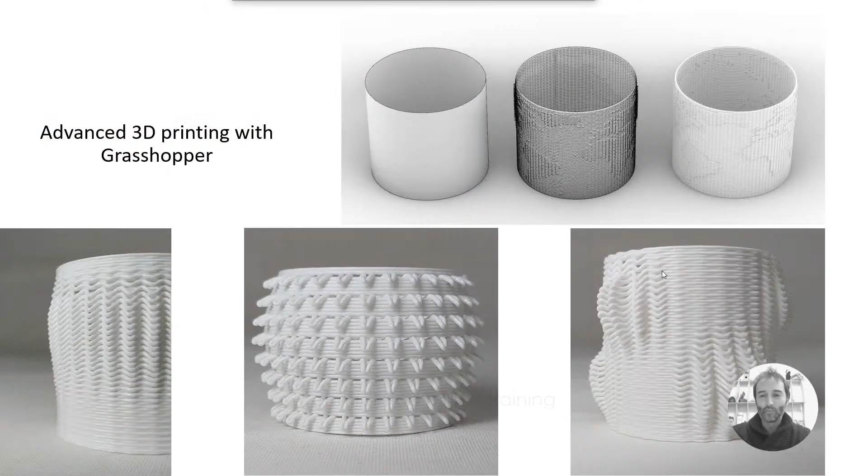There are some examples from the book that we will explain during the course. I know that some viewers of the webinar maybe have bought the book already. Some of them have read it and they give me feedback on Instagram. That's amazing. I love it because we can share problems or things that are not working for them. So feel free to contact me at any time.

But there are many examples that maybe are not that deeply explained, or that the reader of the book had no time to go into. So with this course, I will try to find the base of everything and go through those examples like these ones in the pictures, in order to understand how to control the G-code to create this kind of geometries. In the end, we could do anything. These are just some examples.

For example, I love working with clay, and in that case controlling the G-code is extremely important, because when you're printing clay, the seam is always a problem, basically because the seam will be displayed on the edge of the model. And when you're doing clay, you don't want to have a seam. Also, you cannot modify that easily. So for clay, it's very important controlling the seams. We have collaborated with many designers.

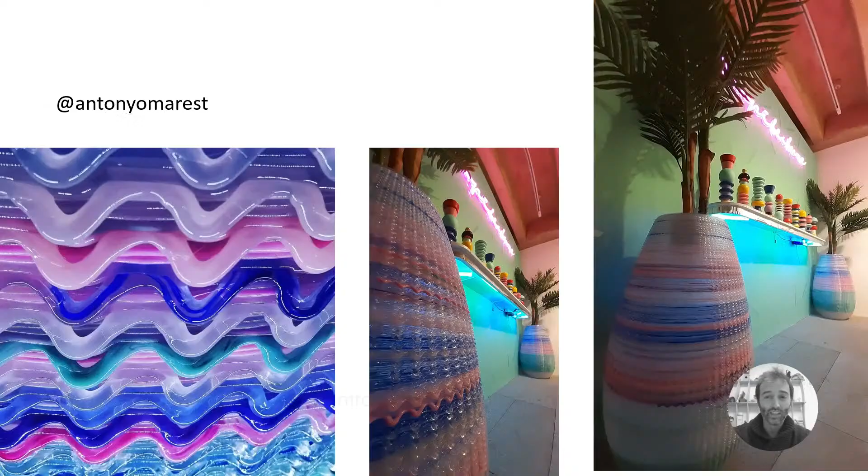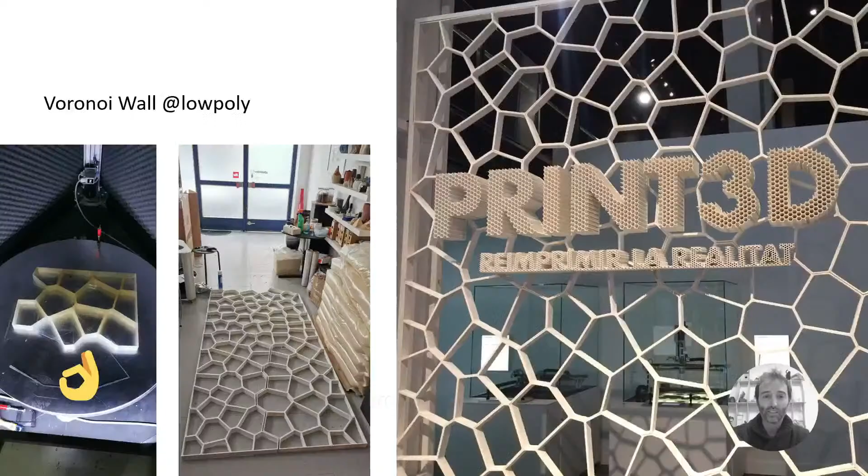These are some pieces he did, some large-scale vases, almost 1 meter high, where we were changing the colors because the printer had a pellet extruder. Controlling these patterns, these waves, is not that easy without entering into the G-code, because most of the time we're not working with an STL file. This is something I will explain later with Grasshopper, okay? But we're basically doing the path for the printer.

And that is extremely important for large-scale models. This was printed with the WASP 3MT, the big printer of WASP, of 1 meter diameter by 1 meter height. This is part of an exhibition here in Spain for 3D printing, Reimprimir la Realitat. We were in charge, with low poly, of doing these walls in this type of Voronoi design. So it was really important to control the path with single lines, double lines where needed, to minimize the travels in order to save time and material. And that becomes especially important when we're talking about robotics with 3D printing.

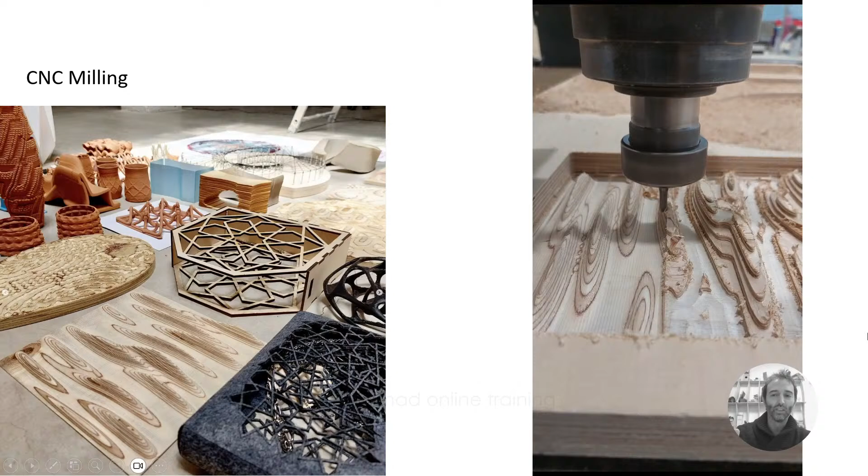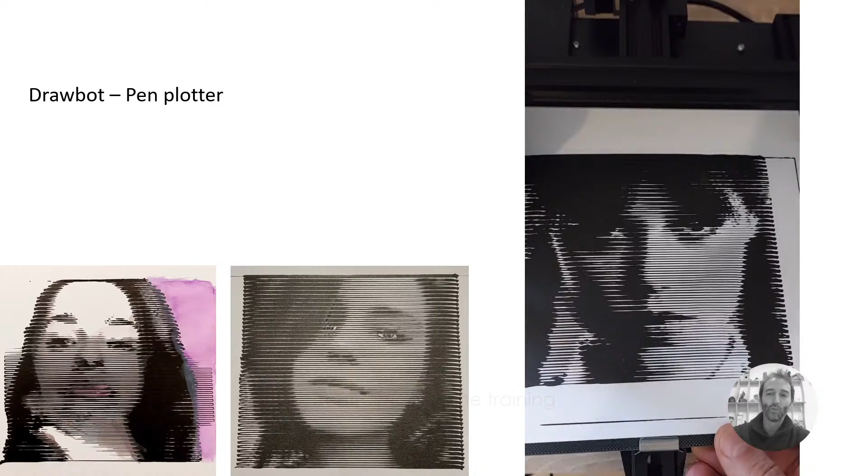Once you know how to control the G-code, you can use it for printing, for a robot, for a 3D printer, for a milling machine, as you can see here that it is doing a parallel finishing. You can use it for any kind of purpose related with CNC, computer numerical control. So this is an example that I love to do.

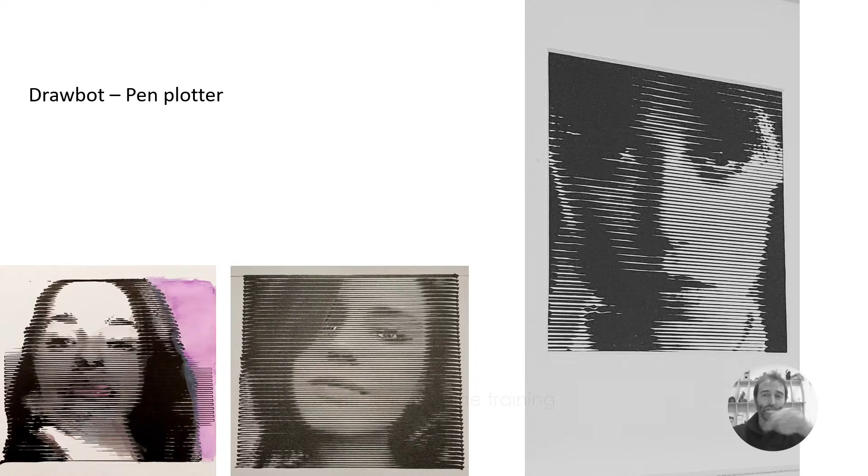I love to work with robots, pen plotters that basically are 3D printers, like in the video. That is an Ender 3 V2 version where you just adjust the extruder to add a pencil or a brush or anything, and in the end what you do is control the motion of the printer, and the output in this case is like a painting. So I find G-code control extremely important for this type of work and many others.

During the course, we're going to work at a small scale, and all the examples that I developed for the course are done with an Ender 3. The Ender 3 from Creality is one of the most popular printers, very cheap. You can buy them secondhand for $100. It's extremely simple. That's why I use this machine, to show that you don't need a robot arm or something like that.

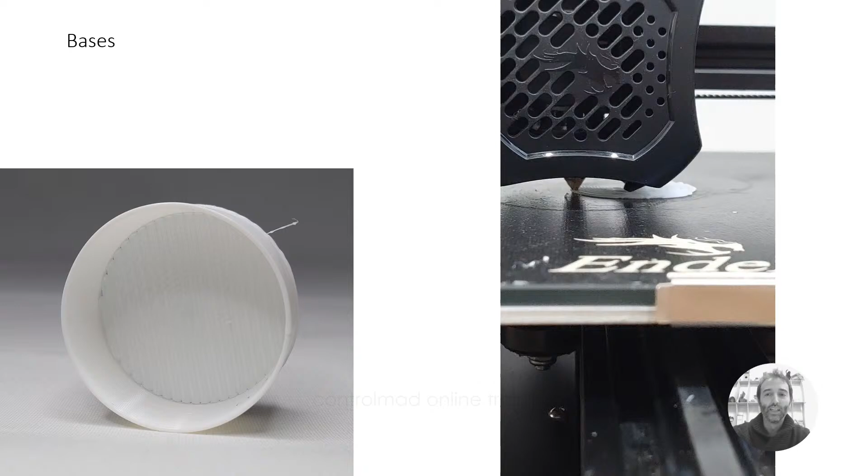Calculating the E value is not that easy, especially if you want to change the nozzle size or the layer height and so on. So we will learn how to put all those parameters into relationship in order to achieve a good result. Then we will go to the bottom and find the best strategy to do the base for the designs.

In this case, this video is not running, but there we go. It's basically doing the base design that can be done as contours or can also be spiralized, or many other things. Once we know how to do the walls and we know how to do the bases, it's just putting together those strategies, and after the base come the walls.

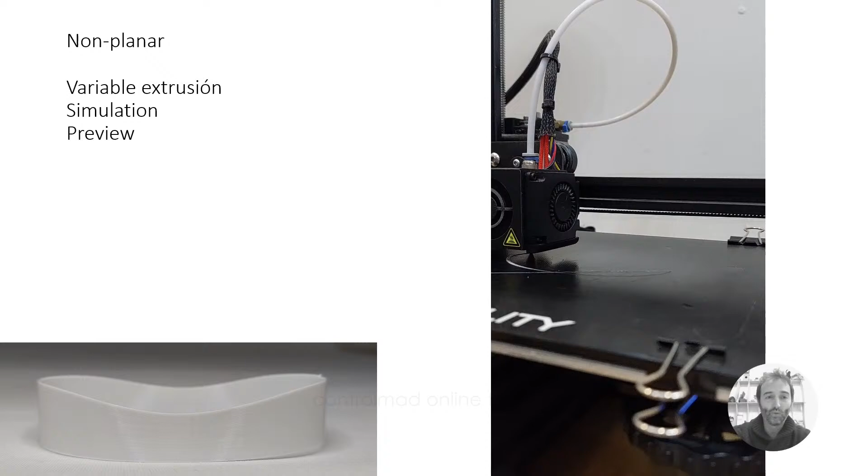As we have total freedom to print almost anything, we can start exploring non-planar designs, and at the same time we'll have to control the variable extrusion of the extruder. It means that, for example here, where the layers are compressed and expanded on the sides, we'll have to extrude less material in the middle and more material in the outer parts, the right and left parts, to have the same thickness for the material.

At the same time, we will try to simulate what's going to happen in 3D, so it's not just curves. We will see them physically, and we will control the preview of the model with different colors and so on. So this is a typical example of variable extrusion. Obviously, we won't have a robot arm for the course. That is something that we are preparing for the future, a course on robotic 3D printing.

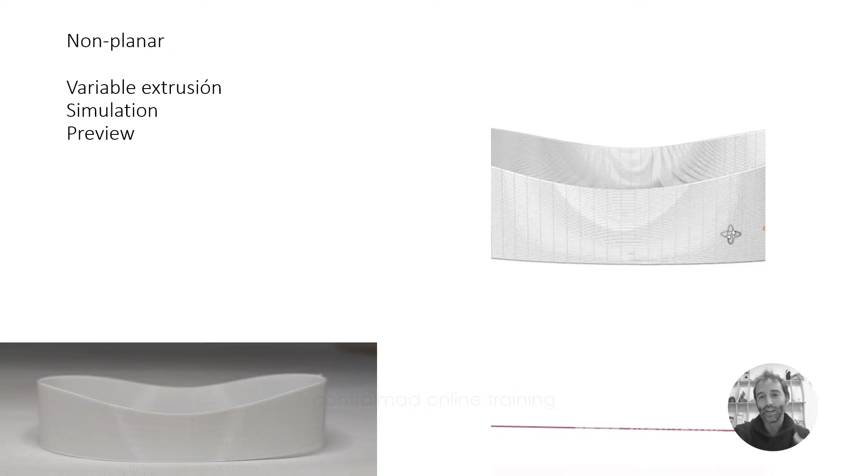The robot rotates the extruder according to the normals of the curve or the surface. With the printer, we cannot do that, so we are limited in the heights of the model that we're doing and so on. But still, we can do many things just with a normal 3D printer.

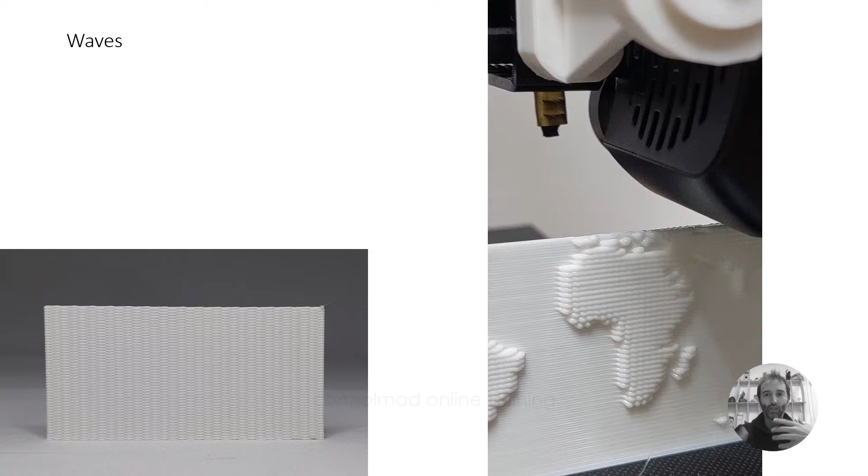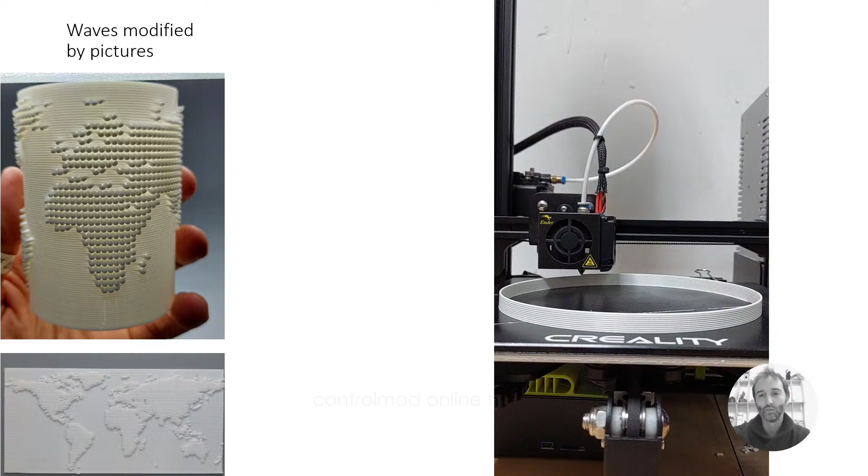As it is very popular, we will also work with waves. As in the picture on the left, we will learn to do wavy patterns, basic ones and more complex ones, and then apply those waves to different surfaces, connected to black and white pictures. This is a very powerful strategy because the black and white of a simple picture, which you can extract from the internet or make yourself in Photoshop, will give you different patterns once you have the weaving system. The waves are just the algorithm, and the picture modifies that algorithm according to the blacks and whites. These are some examples.

It can be applied to just a planar surface, or once we understand it, we could apply it to a rounded surface and more complex stuff. This is an example I did to illustrate the possibilities of printing G-code with this type of printer. I was trying to use the maximum volume of the printer. As you can see, this is part of a lamp project, but we'll do it during the course at a smaller scale due to time reasons.

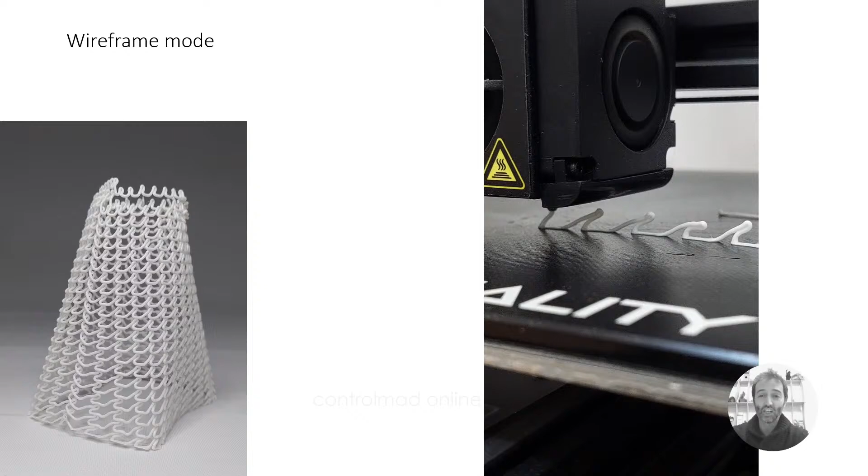And the same as our friends from Nagami, we will explore the possibilities of wireframe 3D printing. Basically it's everything the same. What changes from the previous one is that there we were using an algorithm to create waves, and in this other we're using an algorithm to create a kind of triangular pattern in the air. So we have to do a 3D model, transform it into a wavy pattern that goes up and down with those kinds of triangles, and then the printer will follow those coordinates.

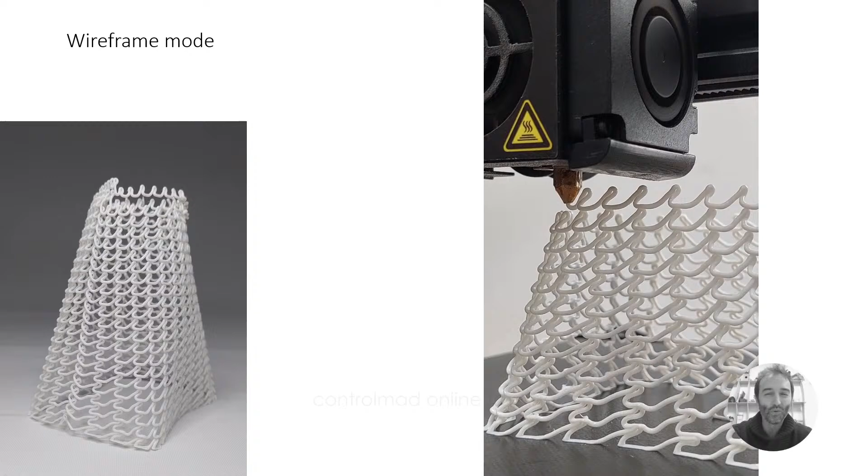So the printers that you have at home can do anything. It's the same as mine. Every 3D printer in the world can do this. The problem is that sometimes we are limited by the slicers, by the software. The slicers are amazing for standard 3D printing, they have all the parameters you need. But when you want to get out of the box, you're very limited by that software. In Grasshopper, any kind of line that you're able to design can be 3D printed, basically.

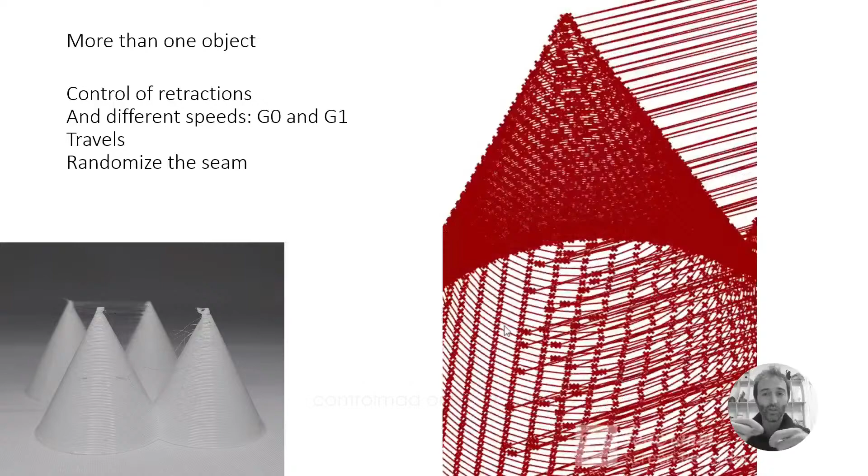Then we will move into something more complex that looks simpler in the end, because it's just a couple of cones, the typical example. But this means we have to 3D print two objects, so we have to calculate and understand the travels. The travel is the motion of the printer without extrusion, moving from one cone to the other. We'll have to control two speeds, one for printing and one for the travel, which is different. So the algorithm in Grasshopper becomes more complex every time, and we will also have to learn to randomize the seam.

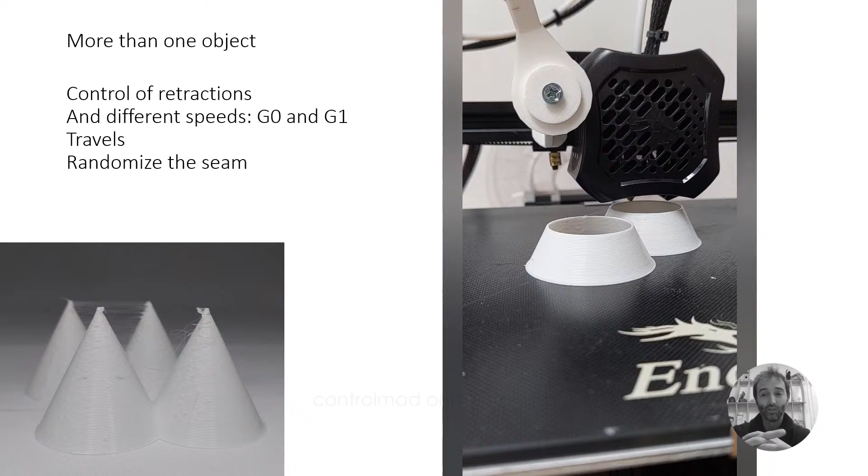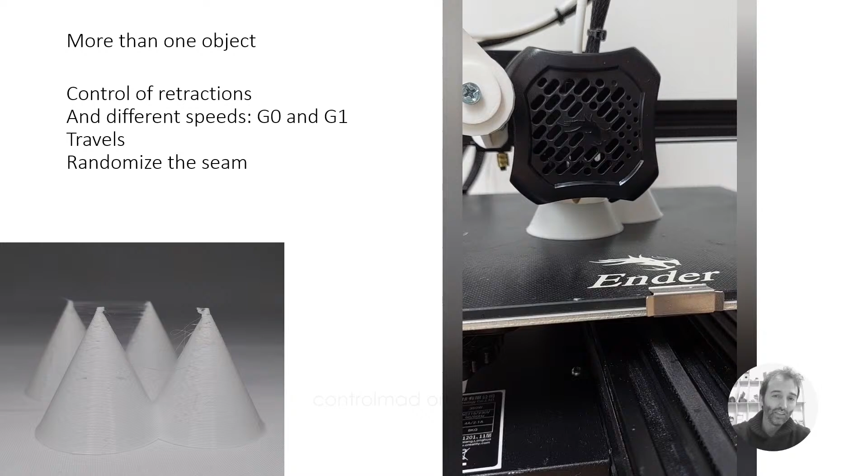We'll see some examples during the course where if we don't randomize the seam, the finishing will not be good enough. There are many details here we have to control, such as the retraction of the plastic back into the tip of the nozzle. That is not as easy as it might look.

So in the end, we will be working like a normal slicer. I made a test comparing my system in Grasshopper with a system like Cura, and the results were the same, even better in Grasshopper, because you have more freedom and can control them better.

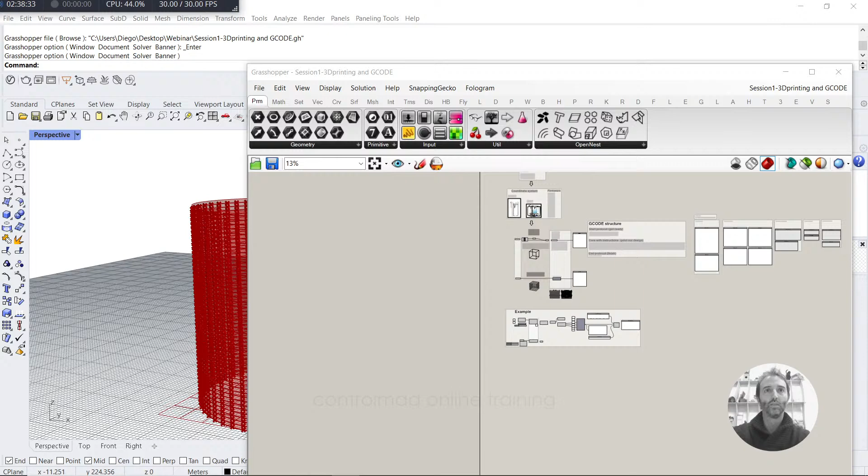We will start with the beginning of the course, because it makes no sense to try to do something super advanced if we don't know how to do the basics.

So I have a presentation here. I love to use Grasshopper for everything. If you research a little bit on me, you will find a video about how to win the lottery with Grasshopper, because I also tried to win the lottery with Grasshopper, since Grasshopper is just a data management software that can work with geometry, but also with data.

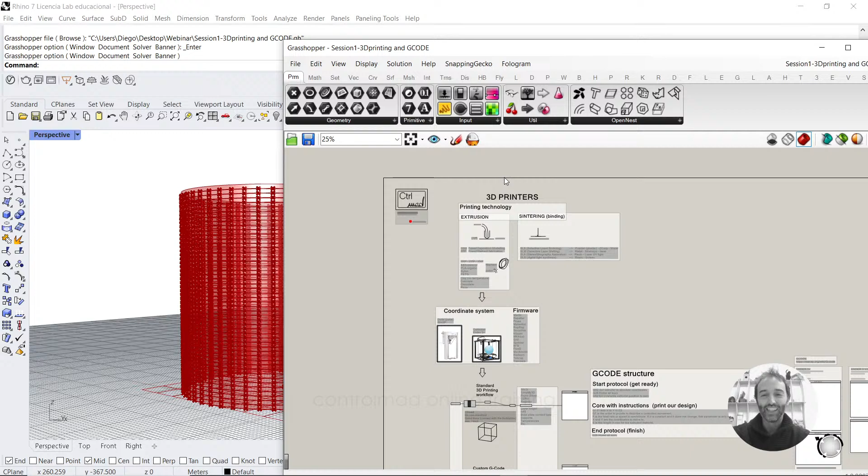Just as we work with data for G-code, which is basically coordinates, we can work with data from a web page, from a database, from the lottery, or anything else. I like to do presentations in Grasshopper with my drawings and explanations and so on.

First of all, we need to understand—probably you are experts on 3D printing, or maybe experts in Rhino and Grasshopper and 3D modeling, or maybe you have no idea about this world. So I'm going to do a very fast introduction about 3D printing to see where we're going to put our focus.

Basically in 3D printing there are two types of technologies: extrusion, FDM, and sintering or binding. In extrusion, we add material on the build plate, which could be preheated or not, and the material could be plastic or many other things.

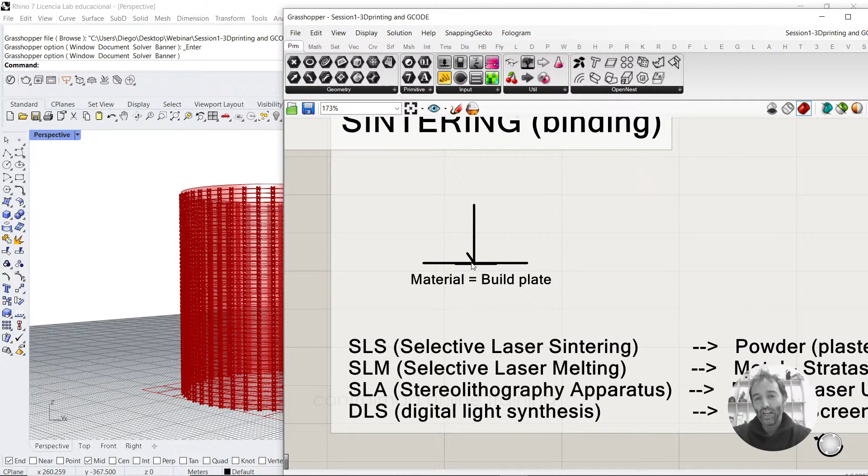In the sintering systems, like SLS, SLM, SLA, or DLS, which are the most common ones, the material is the same as the build plate, and there is another agent that hardens or sinters part of this material. For example, it could be powder like plaster, and the sintering agent is water, or it could be metal for metal 3D printers where the sintering is a laser, or resin printers that use laser, UV light, or a screen like an LED screen.

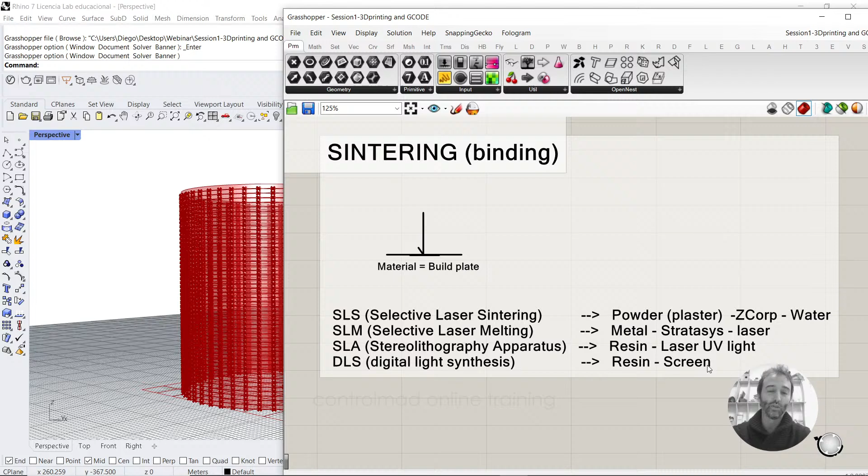But we're going to focus on the extrusion ones, because they are simpler, and so the G-code here is easier to control.

FDM is the general name for this type of machine, fused deposition modeling. If it's specific to plastic, it's called FFF, fused filament fabrication. The most common materials are ABS, PLA, nylon, PETG, and the material could come as filament or pellet—pellets being small balls that melt directly into the extruder.

But it's not only plastic we could use for these machines. That's why I was showing you those examples—we could 3D print clay, and in that case we don't need any kind of temperature to preheat the material. It could also be concrete, chocolate, or pizza.

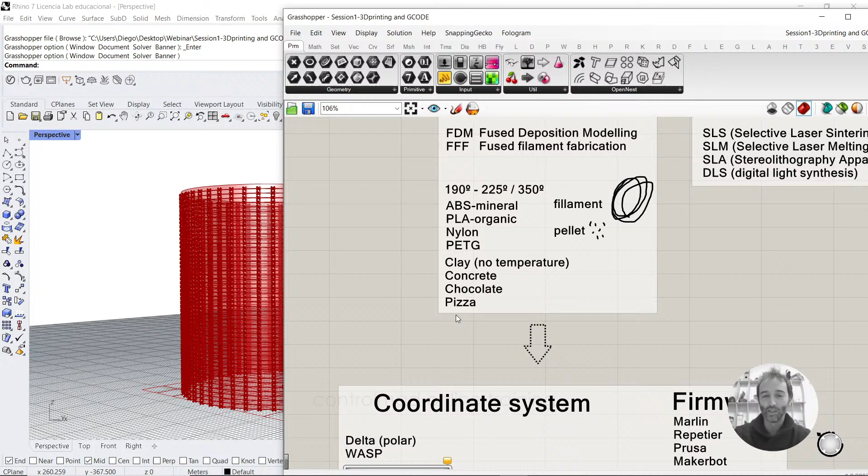Sorry to the Italian people watching, but there is a pizza 3D printer on YouTube, and you can see it has three extruders: one for the base, one for the mozzarella, and another for the tomato sauce. So yeah, we can extrude basically almost everything.

Then we have the printer, which could be two systems: delta and Cartesian. If it's delta, it works with angles, and if it's Cartesian, it works with linear motion in three axes, x, y, and z. But it doesn't really matter which one you have.

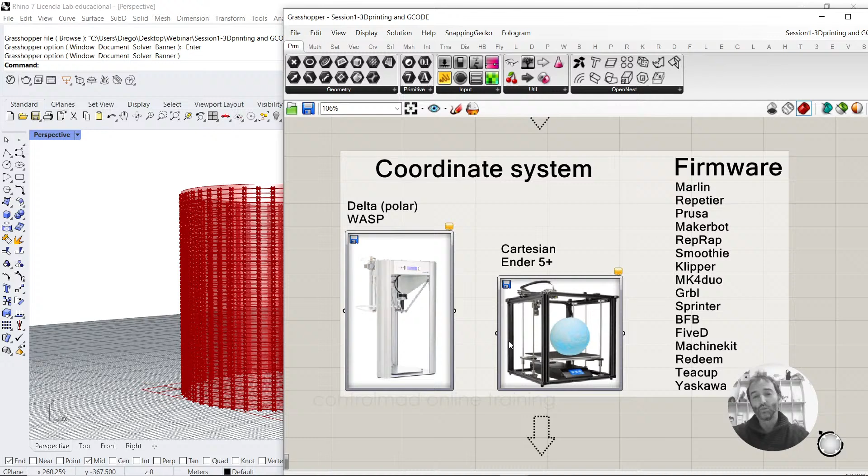These are two examples, from WASP and from Creality. But we don't need to care whether we have this type of printer or that type, because there is something in the printer—a software called firmware—installed in the electronics, in this part of the WASP or this part of our Ender, that handles the G-code we give to it.

This firmware has different flavors, different types—it could be Marlin, Repetier, Prusa, etc., depending on how many extruders we have to move, what the speed is, or the brand, etc.

So it's not so important which type of printer we have for controlling the G-code—it's more important the model we're going to do. For example, if you're a Grasshopper user and you 3D print directly from Grasshopper and Rhino, probably you're modeling in Grasshopper, then you bake that model in Rhino, and it could end up being a B-rep or a mesh. A B-rep is surfaces or polysurfaces, solids.

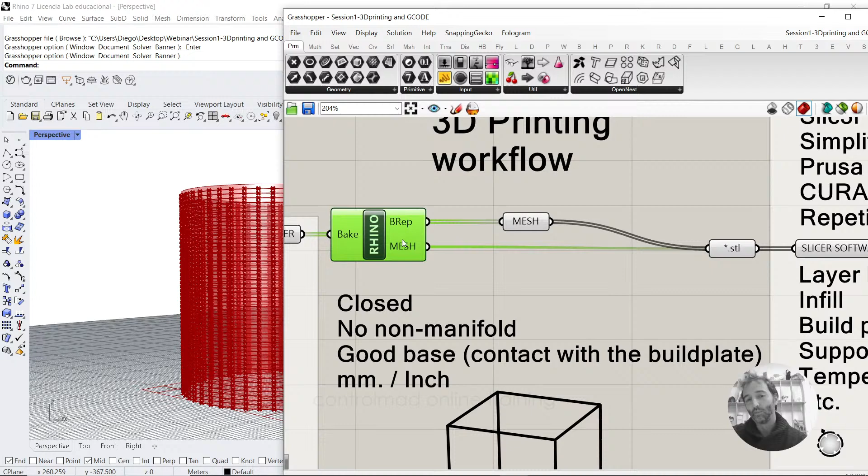So if it's a B-rep, you have to go via a mesh to finally create an STL file. And if it's already a mesh, then when you create the STL file, the mesh stays the mesh—there's nothing to change there. Once you have an STL file, you go into the slicer, which could be Simplify3D, Prusa, Cura, Repetier, or any other. And that slicer is amazing.

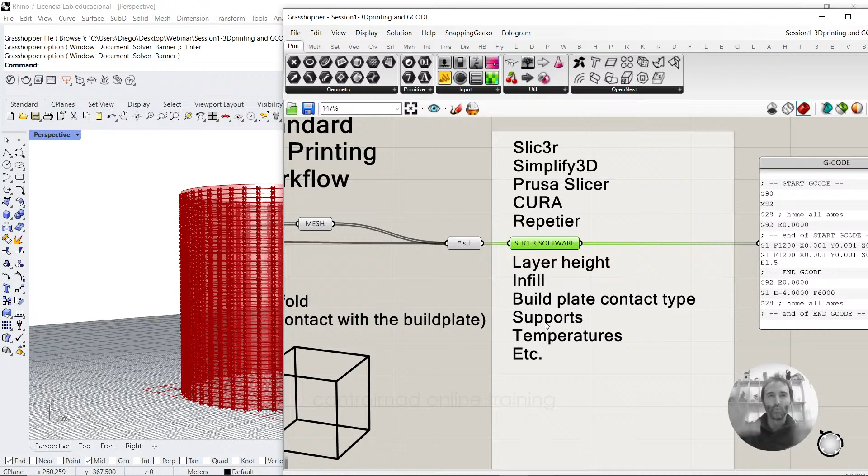It's incredible how people have developed these slicers so well. There, basically, you control the layer height, the infill percentage of the interior, the build plate contact type, if you want supports or not, and what type of supports. In the Prusa slicer, you can even paint the support areas. It's amazing, it's amazing.

This slicer creates something called G-code, the file that you have to send to the machine, sometimes with an SD card, USB, Wi-Fi, Bluetooth, or a wired connection. That G-code has three parts: the start protocol that tells the machine to get ready, the core with instructions of our model that will be different for every model, and the end protocol that tells the machine we have finished and it has to turn off or do whatever.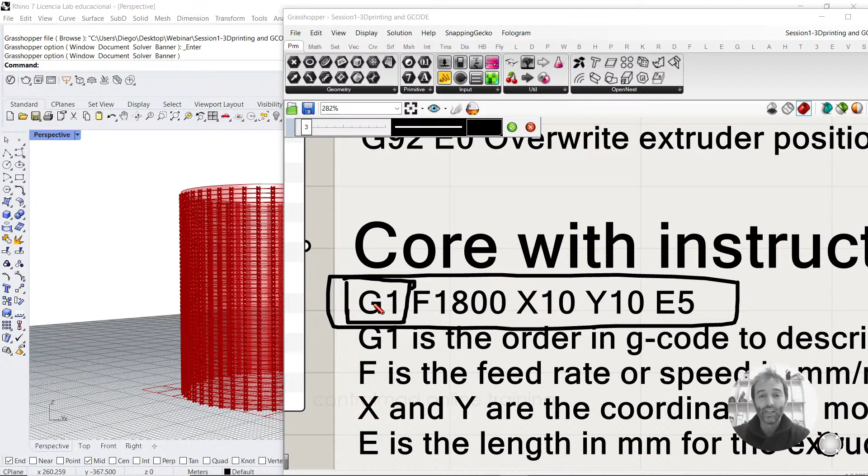The core with instructions has mainly this structure. This is the text you could find more or less in the middle of that text file. G1 is like a shortcut to tell the firmware that the machine, any of these machines, has to move. So G1 is part of this G-code, and it's the order to move, basically.

Then F tells the machine what is the feed rate, the speed in millimeters per minute. And then with coordinates X, Y, and Z - Z is optional, well all of them are optional, but at least we need one of them - we tell the machine what is the next position, the next point to move to.

Then there is one more thing, if we want to extrude material, which is basically what we want for a 3D printer. But for example, if we're talking about milling machines this is not necessary, or if we're using a pen plotter this is not necessary: the E-value. The E-value is the one that moves the stepper motor that pushes the filament or pellet to 3D print.

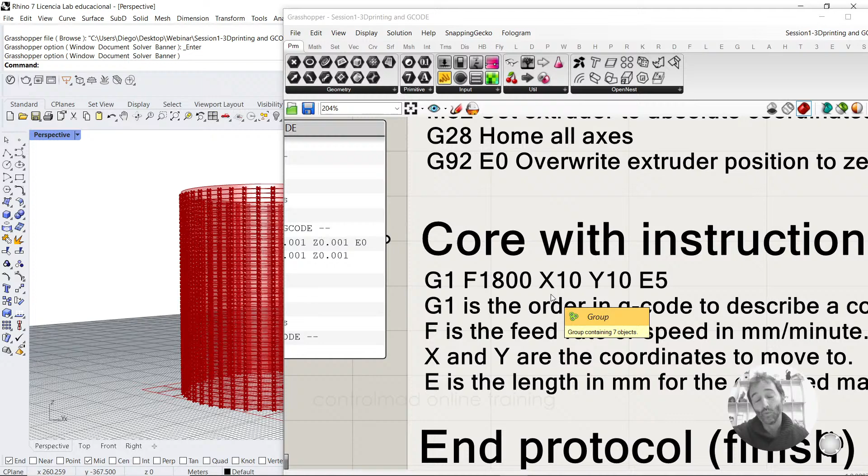So if we combine all this information, the machine will output something that we have designed. This is just for one coordinate. If we have a lot of coordinates, this code will have plenty of lines.

Now, in Grasshopper it's the same. In the end, we will finish with a similar G-code, but we don't need a slicer. This is the key, that we don't need to get out of Grasshopper. We will do all the process, all the steps, in Grasshopper.

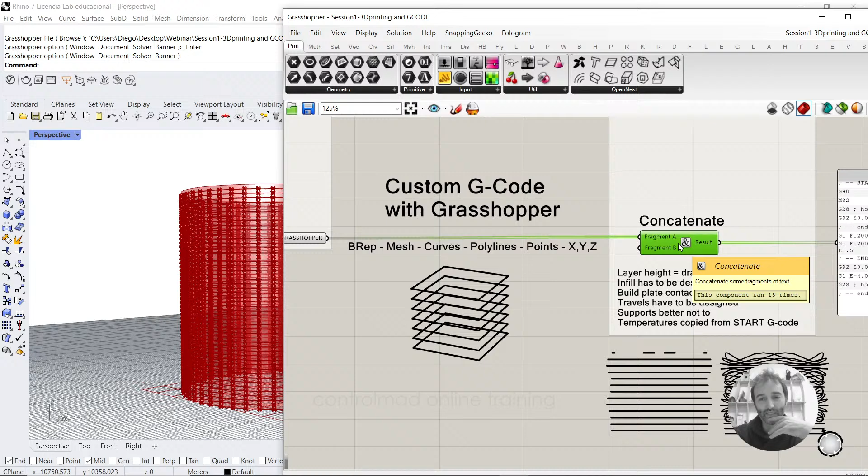So if your model is in Grasshopper, it could be a BREP, like a solid or a mesh, or curves, or polylines, or just points. We could 3D print points, or 3D print a text file made out of X, Y, and Z coordinates, because we're going to use one of my favorite tools in Grasshopper, Concatenate, which is able to create text similar to what we need for the G1 order to move the 3D printer.

So for example, if we have a BREP or a mesh, like this one here - this was our STL file - we have to transform it, act like the slicer, and turn it into slices, into sections. If it's a BREP, maybe they are curves; if it's a mesh, it will be polylines, like these ones here. For that, we use a tool called Contour - maybe you're familiar with it if you've used Rhino before to make sections. This is basically the output of the Contour tool.

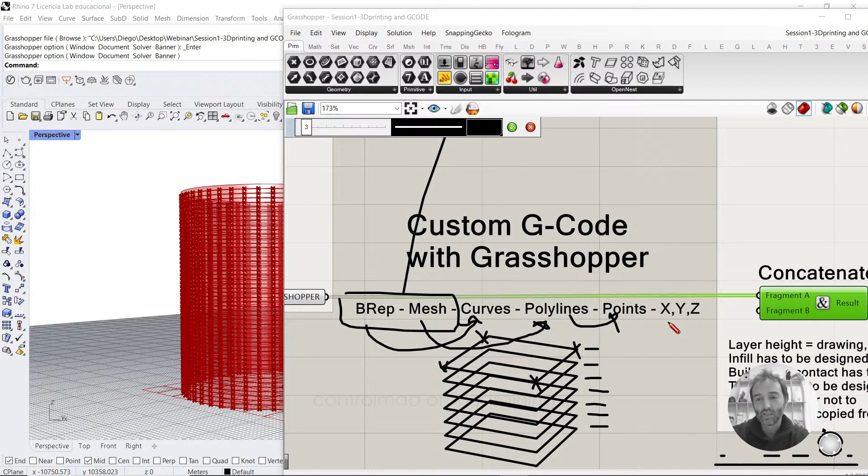From these polylines, we will extract the vertices, the points, and from those points the X, Y, Z coordinates. Once we have split the X, Y, and Z coordinates, it's just a matter of concatenating that information with text that says move at a certain speed or feed rate and a certain extrusion from point to point. So this information goes into Concatenate and outputs a G-code.

This is beautiful because we don't need to get out of Grasshopper, and we have total freedom. So if my polyline isn't like this, if it's doing something in 3D - this is the path - then I just need this point, this point, this point, this point. So I'm starting to print in wireframe mode, non-planar, etc.

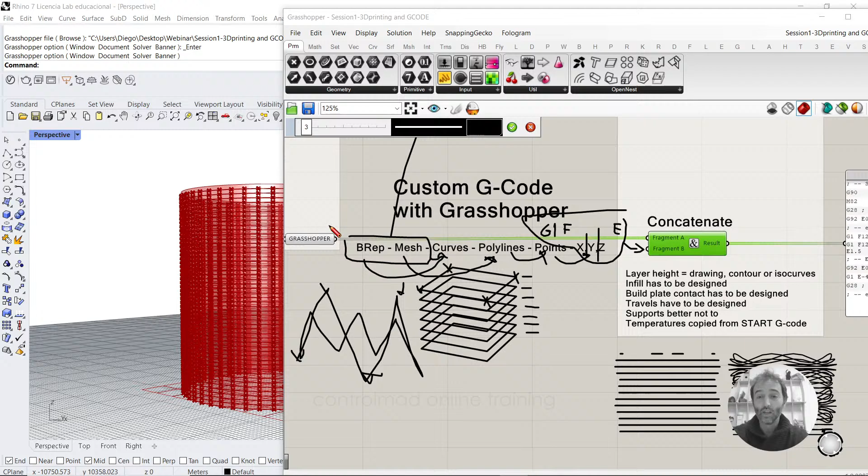Obviously, we have other problems. Not everything was going to be so easy and beautiful.

We don't have any slicer, any software like the ones here, with all these parameters already pre-made for us, only to change them and so on. So the layer height, that is something super basic, will depend on our contours or the drawing that we do, or the ISO curves or anything like that. So we'll have to control the layer height.

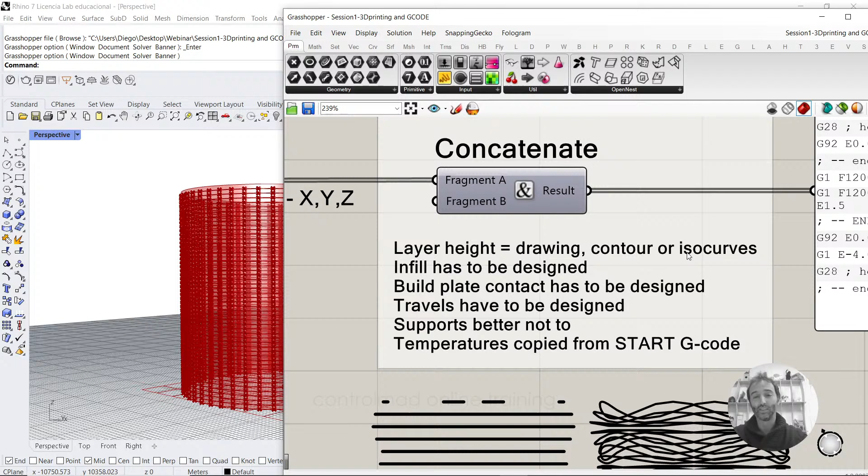If we want an infill, we have to design it. This is super interesting also because you don't depend on the infill options that the slicers have. So for example, if you're doing a pavilion that has a section like this, maybe you don't need infill in this part, but you start needing infill here, and maybe you need a lot of infill in this part because there are some bending moments or some efforts, and then some infill here. So...

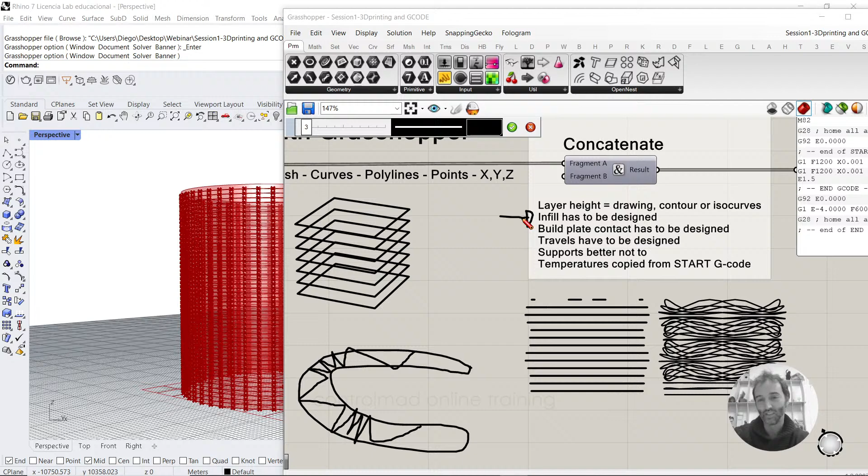Your slicer is not able to do something like this. That's good and that's bad at the same time, because if you want an infill like that, you have to draw it. You have to draw the polyline for that infill, but you have total freedom to create any infill. But there is no infill parameter that you can choose and change the percentage, for example. So it's more freedom or more work, as you prefer to understand it.

If you want any kind of build plate contact, like a raft or a brim or something like that, you also have to design it. If you need to move from one side to another, you have to design and control those travels, and modify the seams and randomize those seams and everything.

If you have to add supports, better not to add supports, because you need to design those supports. But the idea is that we're printing things that should not use supports. In clay, it's not good to have supports, because when you remove them you could break the clay itself, the object itself.

If you're printing at large scale, it's almost prohibited to use supports, because you're going to use a lot of material that you have to reuse afterward. You have to know how to reuse it. It takes more time, it's many kilos of material probably. Maybe you need a grinder to remove those supports because they are huge, so it's complicated.

And if you're working with other types of materials like concrete or so on, then forget about supports. So this is more thought for an experimental part or large scale, so supports are not necessary.

And temperatures for the plastic or for the build plate, etc., can be copied from another start G-code. Remember that we have the start protocol, which tells the machine how to prepare, what temperatures we have to use. So this kind of material parameters, you will have to adjust them here. It's very easy because you can copy them from an existing G-code file.

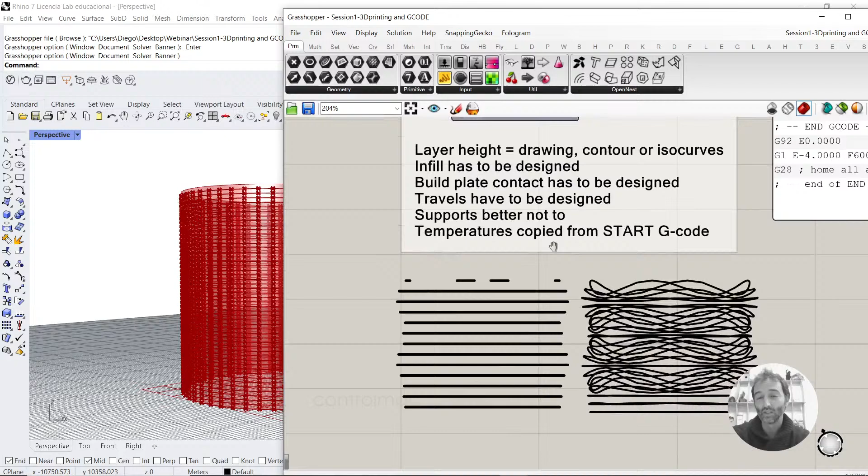Okay, good. So if you're ready, I want you to do this file. It's very easy, but very clear about what we could do. I'm going to start from scratch. There is a bifocals plugin here, a small plugin you can download from Food4Rhino, from our friends at McNeel, that adds the names of the tools.

So if it is the first time that you open Rhino and Grasshopper, let's start from the very beginning. By the way, before I go on...

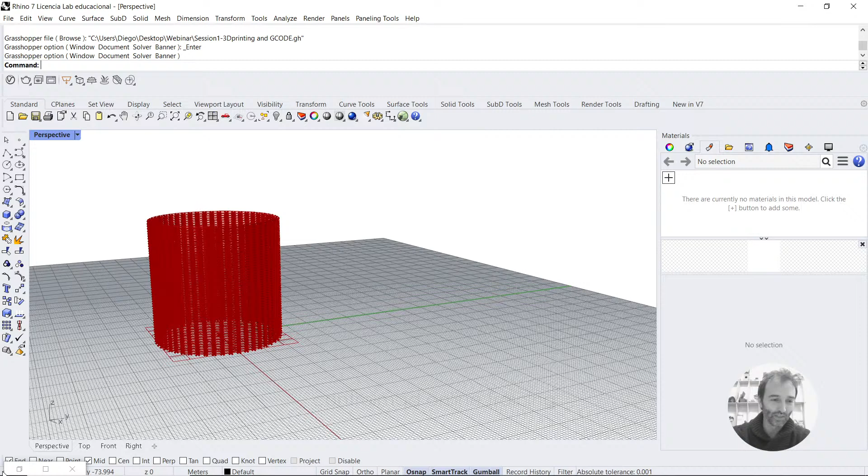Okay, thank you. So first thing that we should do is the very first time that you use Grasshopper, you have to click in here, launch Grasshopper. If you're already an expert and a big user of Grasshopper, you will have the file as a new file, new document. You will see something like this, no? And everything empty. So we're gonna start with just a simple cylinder.

I'm gonna do it myself. I'm gonna use the bifocals, so basically you can see the name of the tool as well as the icon. There's people that prefer to work with icons and people that prefer to work with texts. Okay, so first of all, we're gonna start with a cylinder. You can double click in the canvas or spacebar and start typing cylinder.

Maybe you display it without icons, something like this. Maybe you are displaying it with short names, so you will see Cyl from cylinder. So my advice at least is to go to display and draw full names. Okay, I'm gonna change to icons too because you can see the name of the tool here and the icon too.

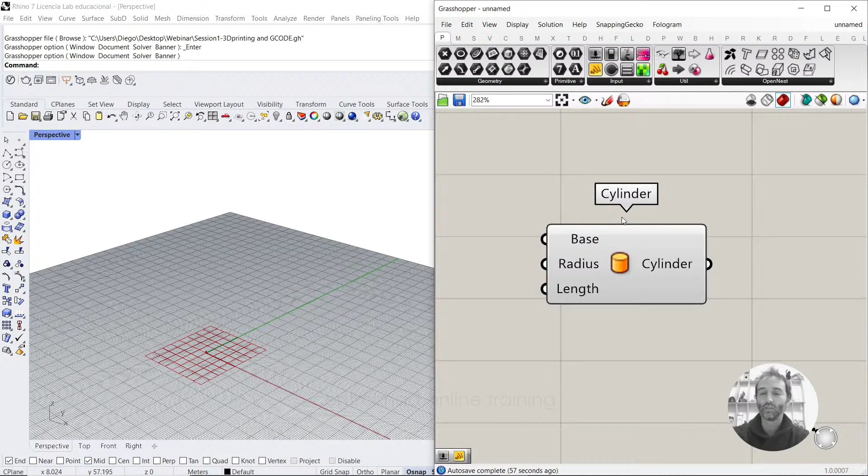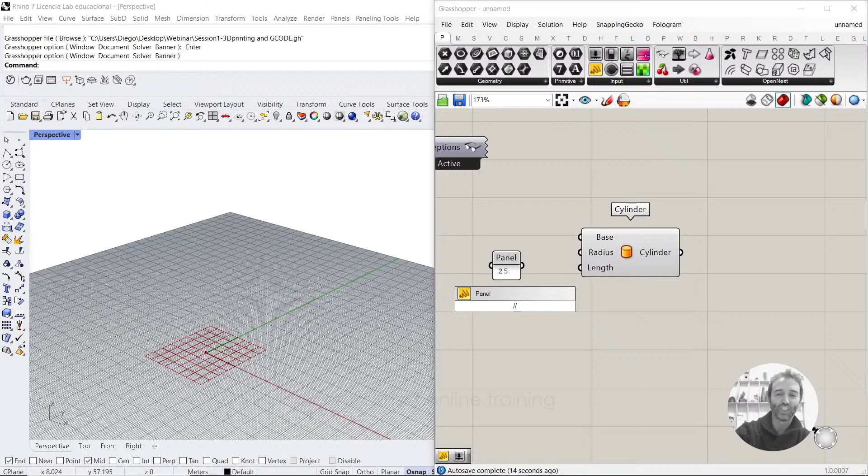As I want to use the same example that I have here, let's follow this thing that is a cylinder of 25 millimeter radius by 50 millimeter length. Very easy. Double click, slash slash to open a panel and type 25. Enter. Repeat again. Double click or spacebar, slash slash 50. Nice. Connect this one to radius and this one to length. There we have a very easy and simple surface cylinder-like.

So we could 3D print this. This is weird. Maybe if you have experience 3D printing and creating the STL file, like a closed object, a watertight object, like polysurfaces or meshes or whatever, because this can't be 3D printed. The thing is that we're gonna create the sections for the path of the printer, and for that we're gonna use contour. You can type contour. Careful, there are several types of contours. The contour that we need is the one that says create a set of Brep or mesh contours, and connect the cylinder to contour.

The point by default 0, 0 is fine. The direction is 0, 0, 1, so Z direction, and the distance is gonna control the layer height. So let's say that we want to 3D print every 0.5. You just type 0.5, no slashes, because this way you can modify it easily with a slider. So 0.5, that's gonna be our distance, and there you will see the circles that are the sections of the contours. Let's move forward.

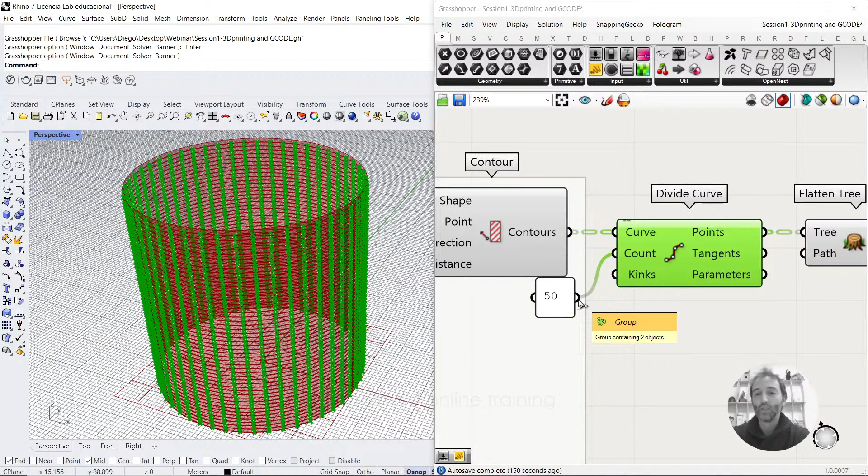Now we have curves. We need points because we have to simplify the information for the G-code as just XYZ coordinates. So what we're going to do is to divide the curve into points. This is very tricky because if I divide it into more points, I will have more resolution and the wall of my cylinder will be smoother. If I divide it in less points, it's like a low poly design with only a few points. Okay, so this number will give us the resolution of the cylinder, and the previous number, the distance, will represent the layer height. So there we have two parameters that are very important.

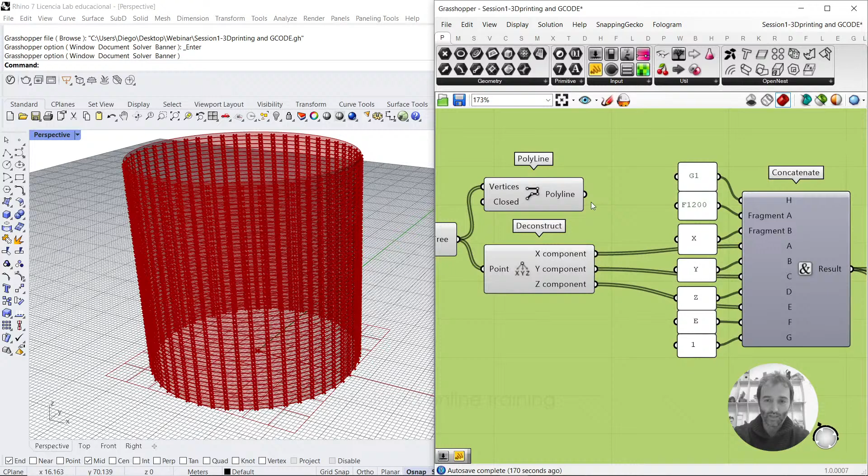And then once we have all these points, we will concatenate them with the help of G1 and F for the feed rate. Okay, but that's next step. Let's go to divide curve in our file. Divide curve. Careful, there are several divide options, especially if you have downloaded plugins like me, that I have plenty of plugins. This comes from Paneling Tools, a beautiful plugin, and many others, but the one that we need is this icon, divide curve.

By default, it's divided into 10 parts. If I want to display the reality of my printing, we have to use a polyline component. You will see. This polyline connected to points will output what we're going to 3D print, not the previous stuff. Okay, so these green lines represent the 3D printing. That is going to be low poly. It's not a hexagon, it's a decagon made out of 10 sides. So it's not a circle.

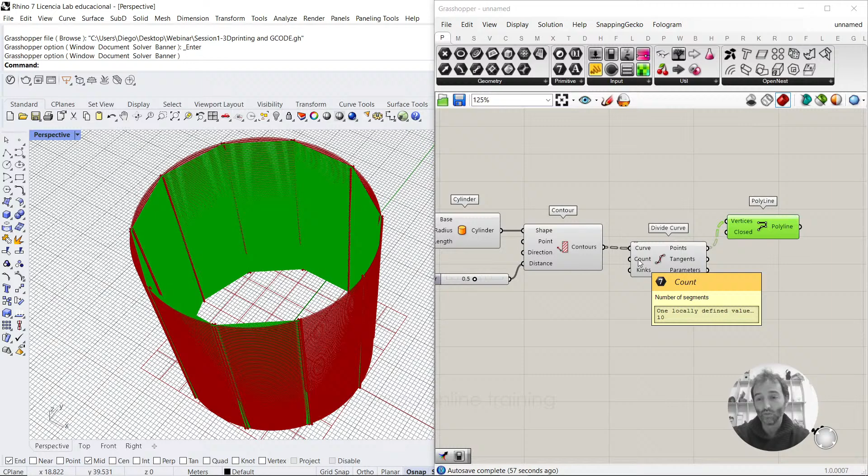So we want to have more resolution. We have to increase this number of points of the divide curve to something larger. I'm going to type 50 or more, or depends. So you see now how my polyline is more rounded because there are more points, or more simple because I have less points. Okay, so this number will change the resolution of my model.

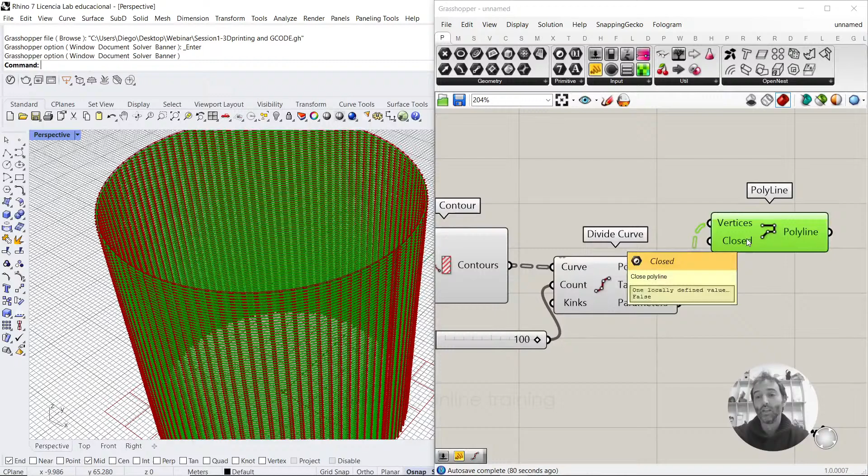Those points from here obviously are described by X, Y, and Z coordinates. The first column is the X, the second column is the Y, and the third column is the Z. It's 0 at the beginning because we're in the first layer, but then it will change to any Z value, as you can see. Okay?

So we have to split this information into those 3 columns and say that this is going to be my X value, this is my Y value, this is my Z, and also I have to add the extrusion amount that we have to calculate, E, and tell the machine to move, and also tell what is going to be the feed rate of the speed. So once we have this information, the machine will move and will extrude, and so will 3D print.

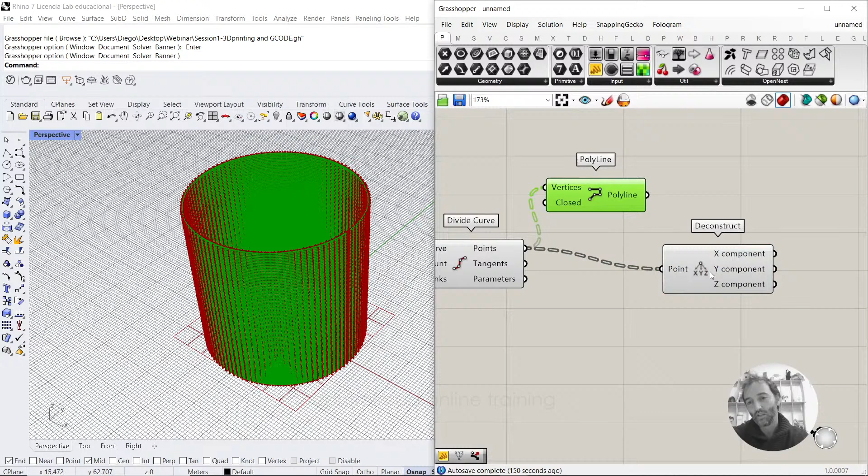To do this operation, we need a very simple tool called deconstruct point. This one here. You see that the icon is like a point split into its coordinates, X, Y, and Z. So the points come here, and what was a panel with the 3 coordinates now will be a panel with coordinates only in X, only in Y, or only in Z. You remember that at the beginning were only zeros.

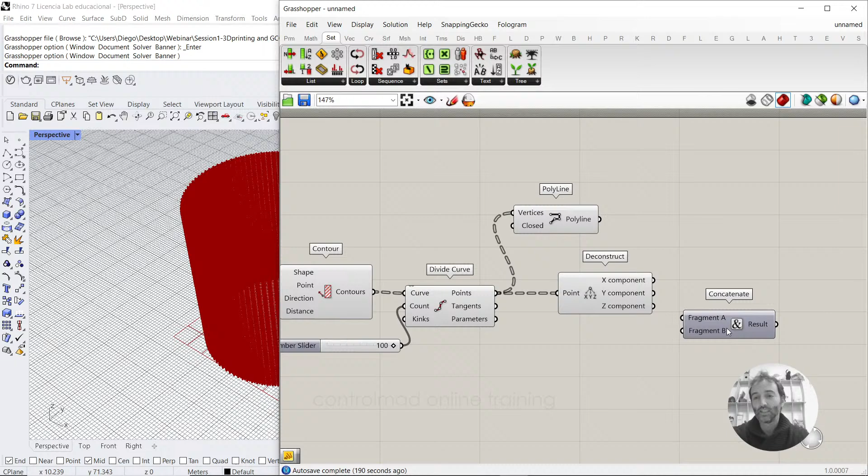Nice. So basically we have to open the tool. I'm going to leave it here, so if you're following, you can see it. I'm going to open the tool concatenate. Concatenate is a tool that is in the set text menu. And the magic of concatenate is that you can add fragments of text that the tool will put together into a final text.

We have nothing now, but if I connect the X here, I will have the X values. If I connect the Y values after them, it's not easy to know where X ends and Y starts, no? So what you have to do is to open new fragments, new options. If you zoom in, this is one of those tools in Grasshopper that has the capability to add more inputs. So you have to zoom in and add pluses in between. So I'm going to add a plus for the X and a plus for the Y.

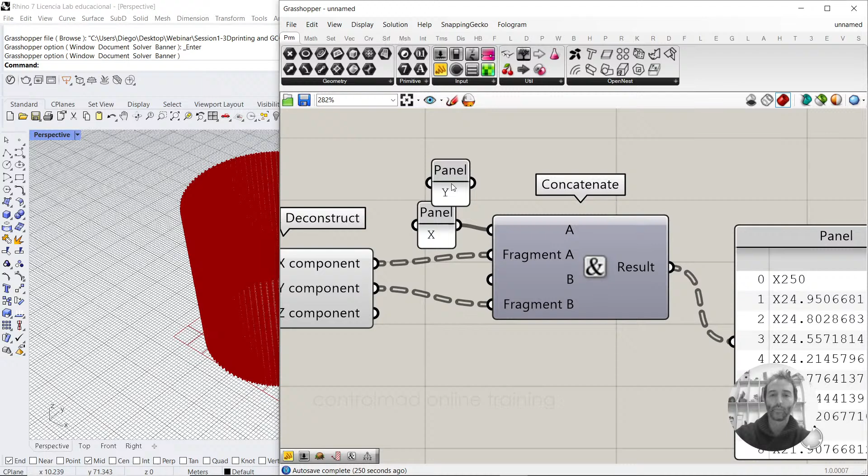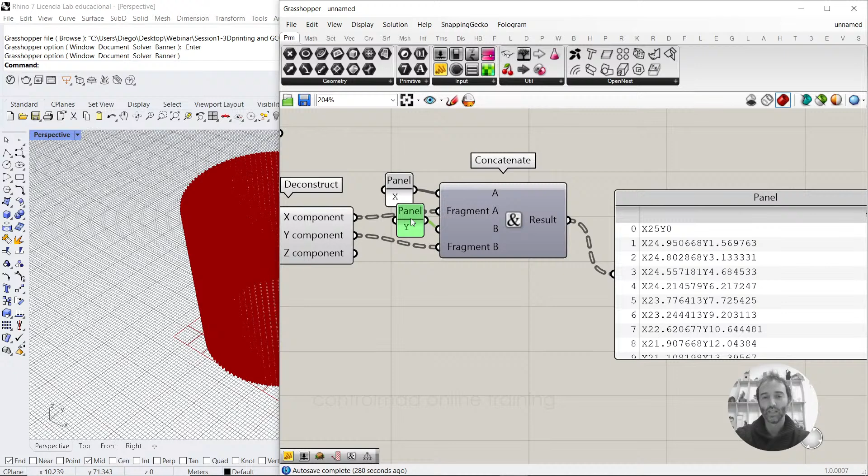So with / to add a panel, X. Now this becomes my X value. / Y. And now this becomes my Y value. This cannot be together. The last number of the X cannot be glued to the Y letter. We have to separate them with a blank space. We can do it easily if we enter into the panel and just click before the Y and add a space to it. You see how it works.

So if you remember the structure of the G-code, we'll have to start telling the machine to move. So I'm going to add more inputs here with the information. So / G1, and maybe I can add also the feed rate, the speed, directly in this one. So blank space, F, and the speed in millimeters per minute. Could be 2000, whatever. And one more blank space to separate from the X. Let's see if it works. I forgot the last blank space. Now, yes, perfect.

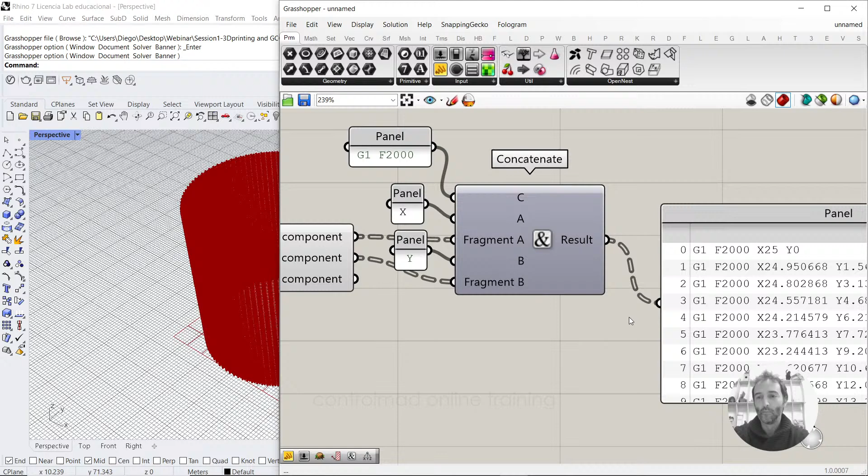So this is very interesting. I'm telling a machine to move at this speed to these coordinates in X and Y. But as it is just X and Y, my printing will be flat. I need to grow in the Z, the volume. So back to concatenate. Let's add a couple more inputs. One for the Z, so / blank space Z. Okay. So we get the Z there and the coordinates for Z value.

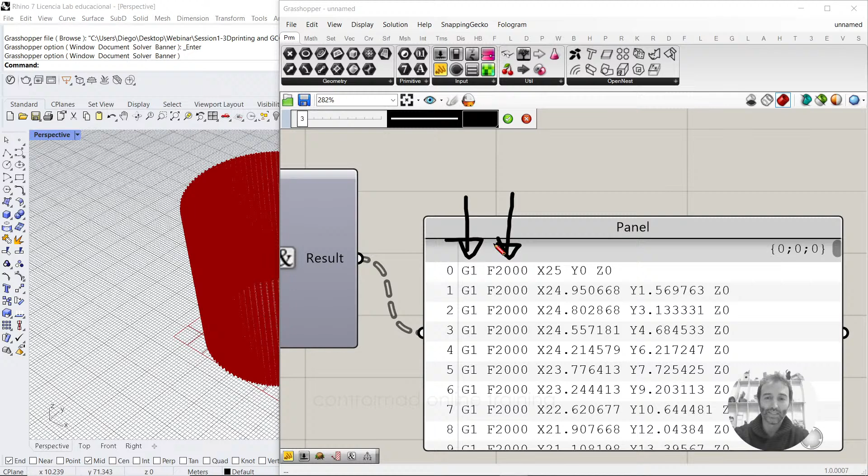And finally, we need the fourth motor of the printer to extrude material, because this is going to prepare the machine for motion. It's like move. This is going to set the speed. And this sets the three motors for X, Y, and Z, so they know how to move. For example, if it is Cartesian in X, in Y, and in Z. Okay, but the machine will move. Of course, if we add a pencil, we'll have a drawbot or a pen plotter, no?

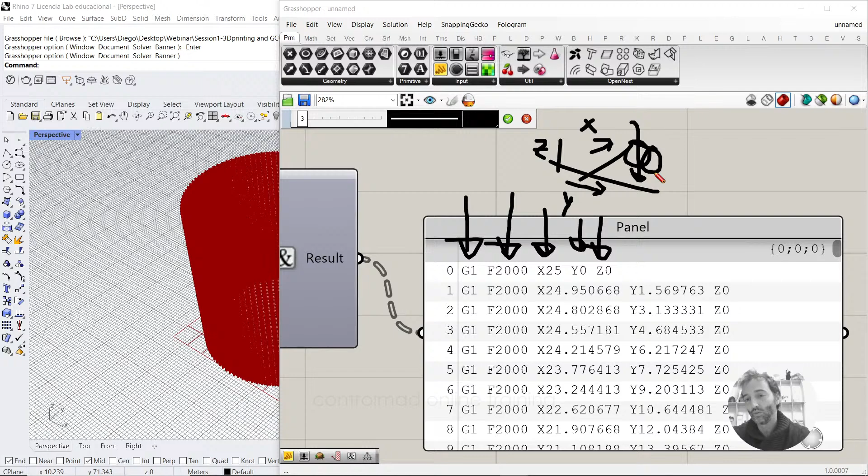But if we want to extrude, there is a fourth motor in here that we have to tell that the filament or the clay or anything has to be extruded. And for that, we need to add the letter E for extrusion. So a couple more of this with a letter E.

Remember to add the blank space just before E, not like me. Now, much better. And the values for E. The calculation for the values for E is not that simple. It's not something that I have time to explain right now. I need more time. It's something that we explain correctly during the course.

Now, let's say that it's going to be any value. As it is a circle and the distance between points is always the same, the E value will be constant, will be the same for this point, for this point, for this point, because it is an interpolation that the stepper motor of the machine does to add material from this point to this other point. And so if you tell it to extrude 1 millimeter of material, it will rotate and it will add 1 millimeter of material from one point to the next point. So it's like an interpolation.

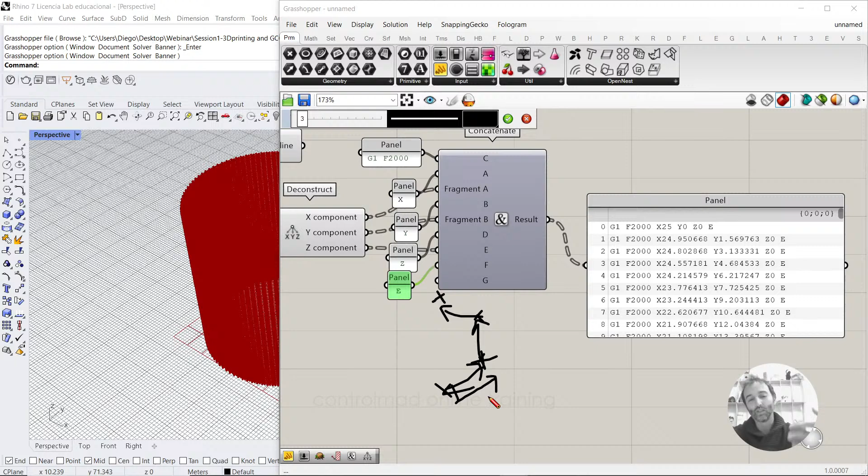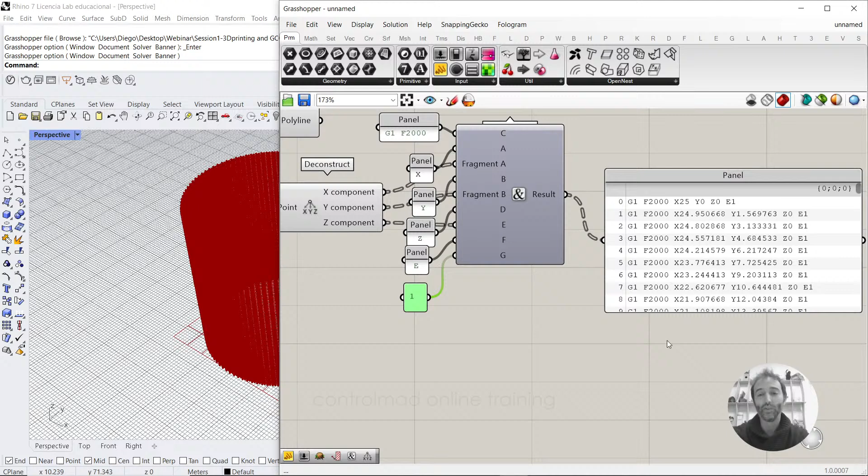Now, as this is something not that easy to add, we're just going to say a number, any, 1 from point to point. Maybe it's a lot, maybe it is not enough. I don't know, okay? Because that is in proportion with the layer height and the distance from point to point. And also the nozzle diameter. We have three factors, no? Imagine that we have to control the nozzle diameter plus the distance in vertical, that is the layer height, as well as the distance from point to point.

It's not the same value. We have to extrude from here to here. Then we have to extrude from here to here. The volume of material, obviously, it's almost triple in this one. No? So we have to put everything into relationship, the distance with the layer height, with the nozzle diameter, to calculate this value here. Okay. But basically, we have it.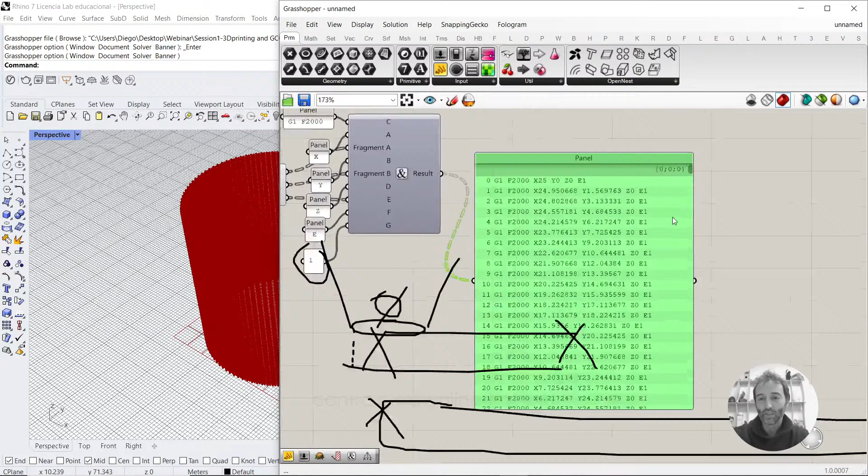We have it. There is something weird still: if we move downwards, let me see if I can get it. Yeah, there are these dark lines that are related with the lists of the model that we have. The model is not done all in one single list, it's done in a data tree, basically because of the contour. What the contour does is that it takes the cylinder and every single section becomes its own list. This is one list, this is one list, this is one list. And so the division points are division points of different lists.

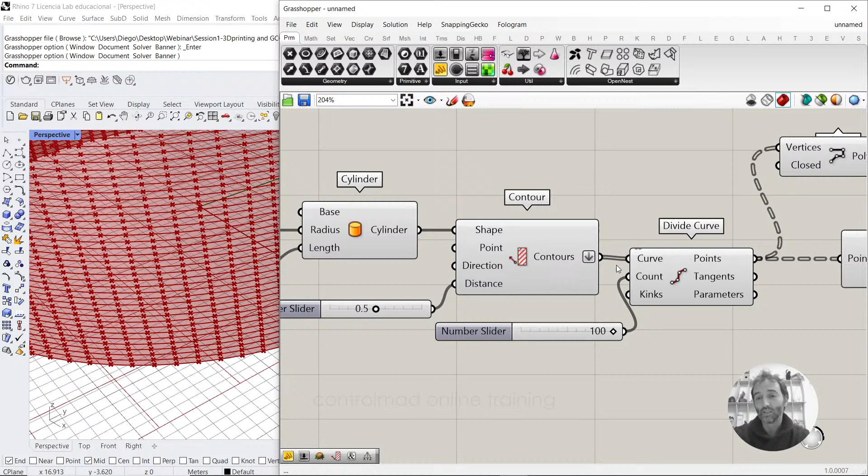It's weird to have the information split by layers. So we usually do a flatten tree, so we deal with all the points together, and one more flatten here. So there are no divisions between layers. Okay, that's more related with data management inside Grasshopper that you can find in the menu of sets for lists and for data trees. So I'm using the option flatten tree. If you're a Grasshopper user, you know perfectly what I'm talking about. If you're not, it's important that you get familiar with this type of content if you're interested in doing the course.

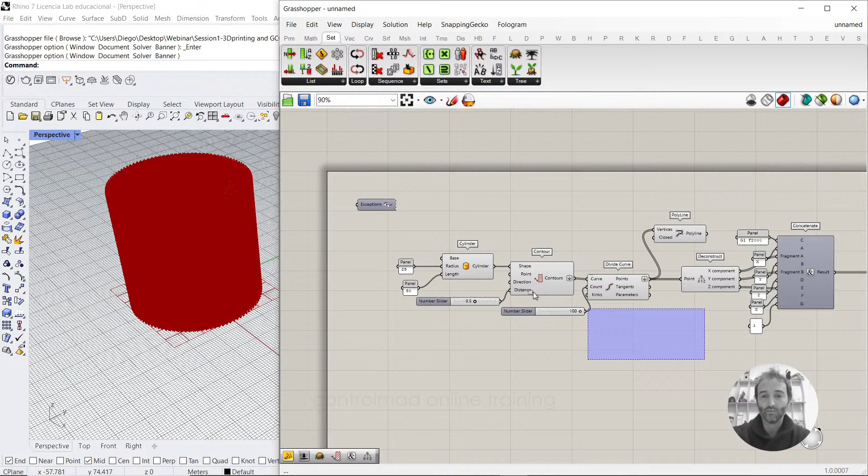And finally, this describes the model that I have in here. Basically, if I turn off all this stuff, preview off, and display only the polyline, this G-code is explaining this path, this polyline. Okay? But the machine cannot start printing like this. Like if you wake up and you don't drink a coffee first, no? For me, it does not work. So I need the coffee first.

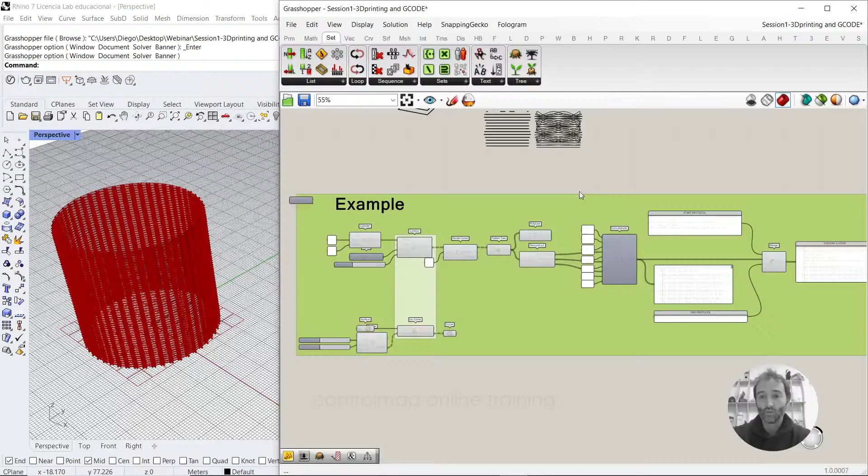The coffee for the machine is basically the start protocol. The start protocol could be different depending on the type of machine. I have some protocols here for our students when they come for the master course and so on, so they can use them. So we have start protocols for all of the 3D printers that we have. You can get those protocols easily from the developer of the machine. They give you these protocols, or sometimes from a file that was already 3D printed.

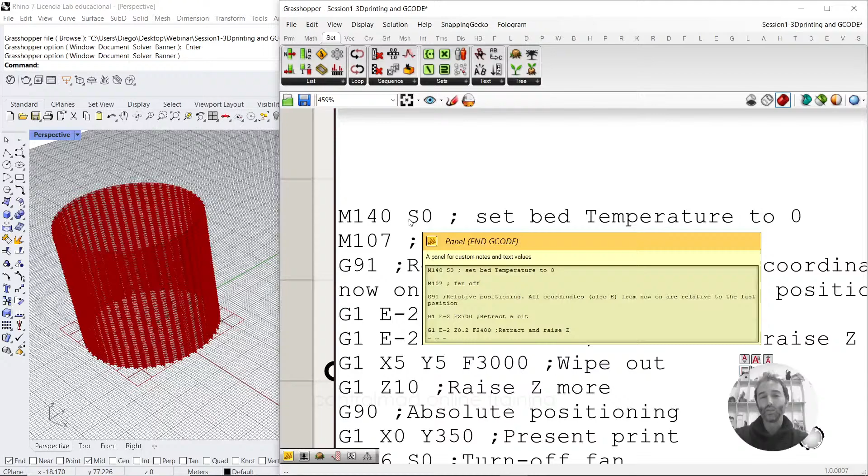So for example, if I use Cura as a slicer, and I 3D print something with Cura, Cura is going to get this start G-code to prepare the machine, and then the G-code that corresponds with the model. And then at the end, all these protocols that tell the machine, for example, to turn off the fan or to set the bed temperature to 0, because maybe the bed temperature was 70 degrees. No?

And so all these kind of things can be copied from an existing file that you have already done in Cura or any other slicer. Okay, I have them here ready. I've already isolated them. But for example, if it is for clay, look, it's super simple. For clay, you just need to tell the machine that you're going to use absolute positioning for the coordinates. Always refer to 0, that's what it means.

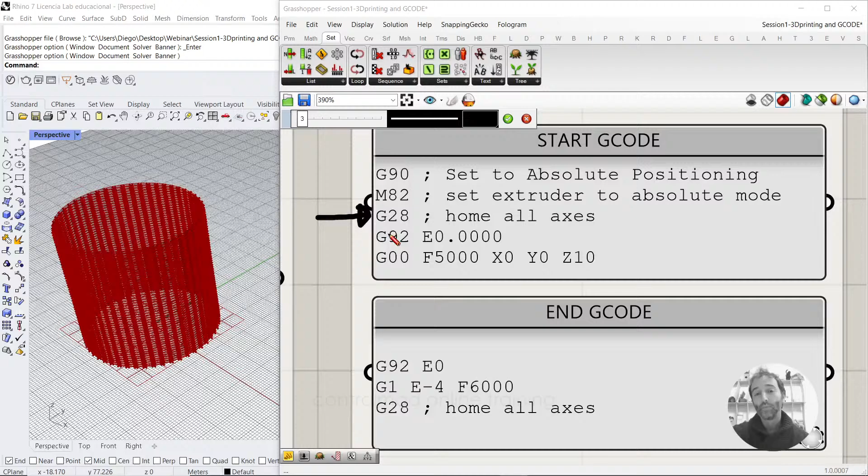The extruder also could be absolute or relative mode. It means that you can add the coordinates for the values or not. G28, this is super common, means home all axis for the printer. That's when you turn on the printer and it goes to the origin, like beep, beep, beep. That thing means G28. That's the order to do that. And to reset the extruder, G92 to 0 and so on.

Okay. So for example, for clay printing, as we don't need to preheat anything, it's extremely simple, and the end G-code the same. For plastic, we need to tell the machine to do more things. For example, to preheat the bed temperature, so M140, 105, 190, etc.

If you want to know more about G-code, I always use the same web page, the RepRap project for G-code. RepRap is a pioneer group of people on 3D printing that decided to have everything open for everyone, for the public to learn, for people to learn. And so if you type in Google RepRap G-code, you will have access to this web page. Let's see if it opens.

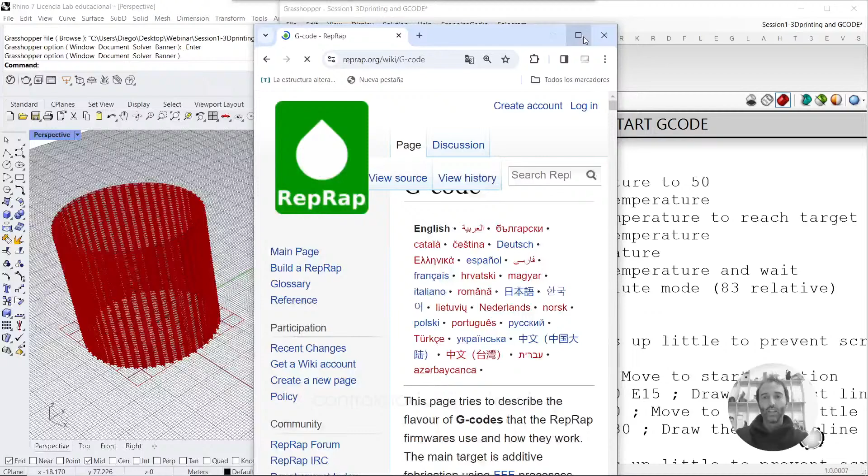Yeah. With the explanation of the most common orders in G-code. So G1 is the one that I was explaining to you to move the machine, but there are many. G28, the one that I was referring to before, move to origin, to home. And so if you don't know how it works, you just click in here, and first of all, it will tell you which firmware supports this tool, all of them obviously, and how it works.

You can tell the machine to home in X or in Y or in Z, or specific for Prusa, and they give you an example. Just G28, home all axis. G28 XZ, home only the X and the Z axis. So it's a beautiful web page that if you want to go deeper with G-code to try to understand something by yourselves, I always recommend.

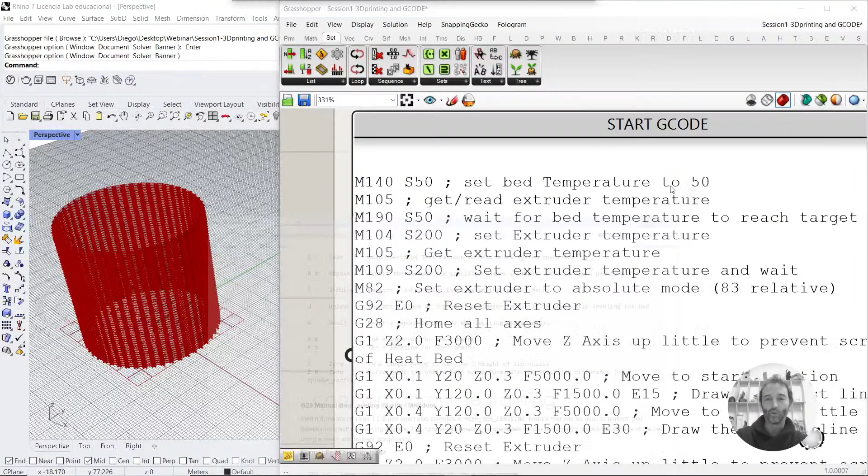And so if we have the start and end G-codes, just copy them, Control C, and going back to my file to show you as an example, Control V, Command if you are in Mac. And we have to tell Grasshopper that this is the first part, this is the middle part, and this is the end. We can use merge component, where this goes first, this goes in the middle, and this one goes at the end.

And so the final output is that we will start with the machine preheating the temperature for the build plate, etc. Then we'll have the coordinates of our cylinder, and at the end we will tell the machine to turn off and to set the temperature to 0 back again, etc. And once we have this, you will say, yes, very nice, but how can I put this into my machine? There are several ways. The easy one, right click, copy data only.

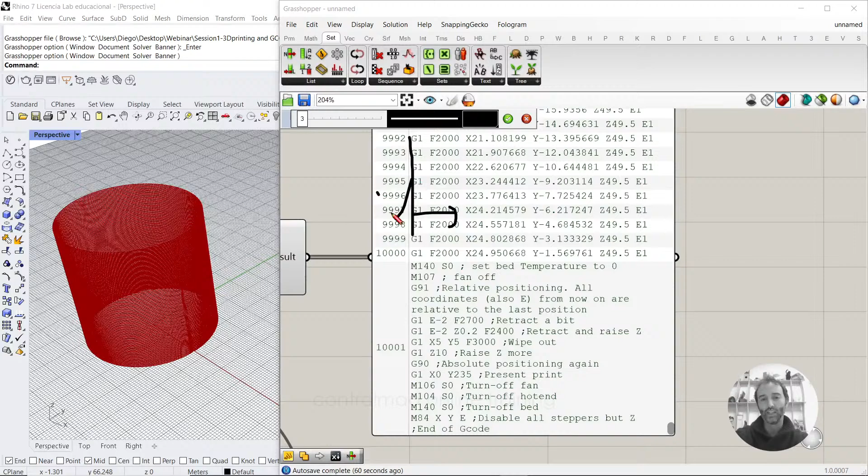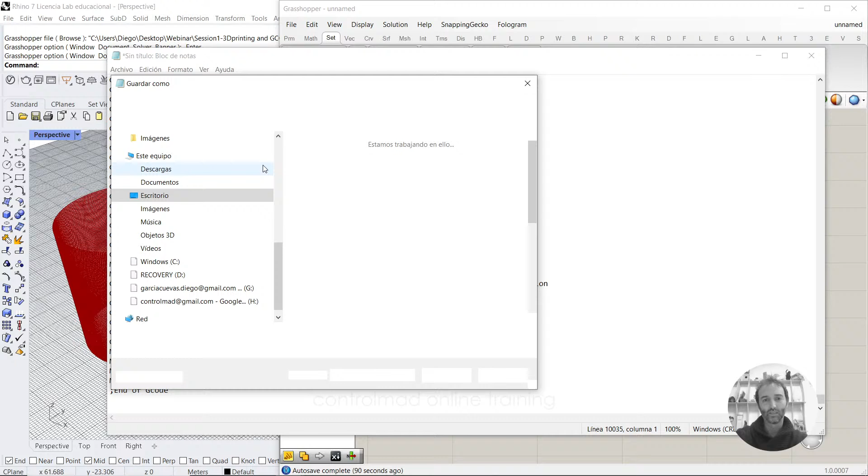Copy data only means copying from here to the right, not the indexes, not the path of the list, etc. And then you can open a very, very complex software. Did I open it or not? That is bloc de notas in Spanish. How is this called? Notepad in English, where you paste it and save it as any kind of file, cylinder.gcode. That's it.

You just save it, and that file can be copied in the SD card and put into the 3D printer and launch it. This can be done more automatically. You don't need to open Notepad, but I wanted to open Notepad just to show you that it's a text file. It's not something weird. Okay.

So sorry if I was a little fast or simple in the explanation. It was just to give you an idea of the possibilities of the course and the G-code.